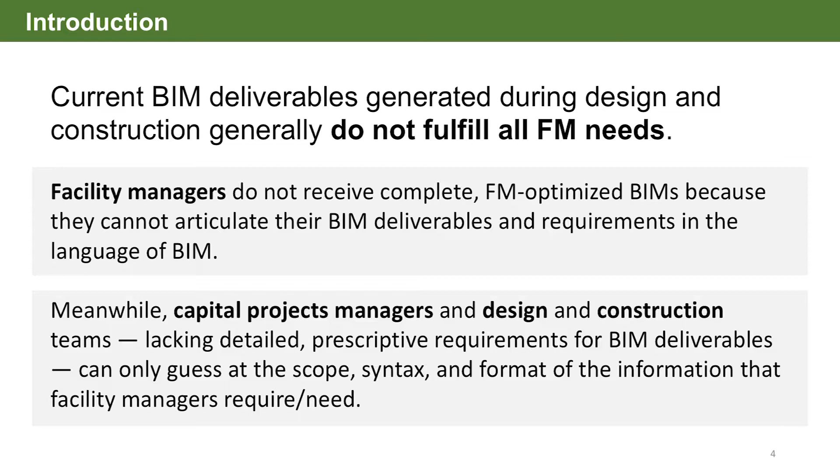Because of that, Virginia Tech is in the process, as many of you owners in the room are trying to get to that point where you actually develop your standards and specify what you really want from the design and build team.

We're focused in our application here on delivering something that would help the BIM model that designers and contractors develop during the design and construction period, to make it an FM-capable BIM. Some people yesterday referred to that as FIM, Facility Information Model. I'm going to keep the acronym BIM, and add to it FM-capable—they all mean the same thing: something the owner can really use towards their operation and maintenance.

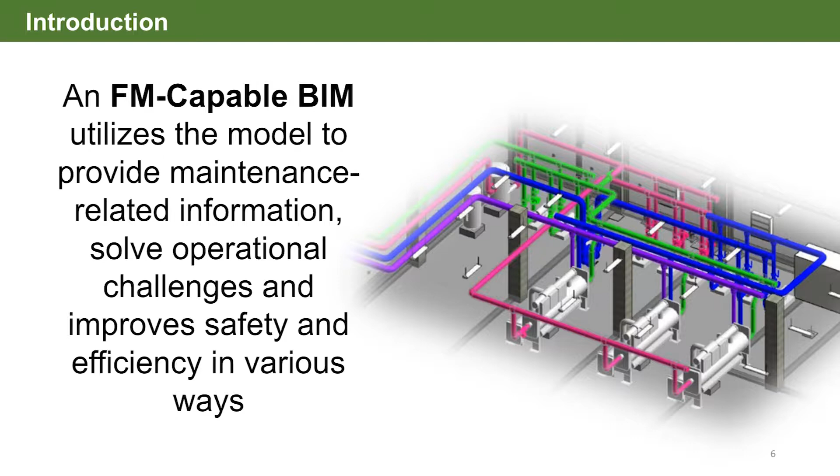An FM-capable BIM should have related information to solve operational challenges and improve safety and efficiency for the client. It should have four main elements, and we're targeting one of those elements today with our application. It should be a central repository for accurate and reliable data and information. It should provide accurate, complete representation and visualization of the facility being built. And this is where we come in with our potential solution today.

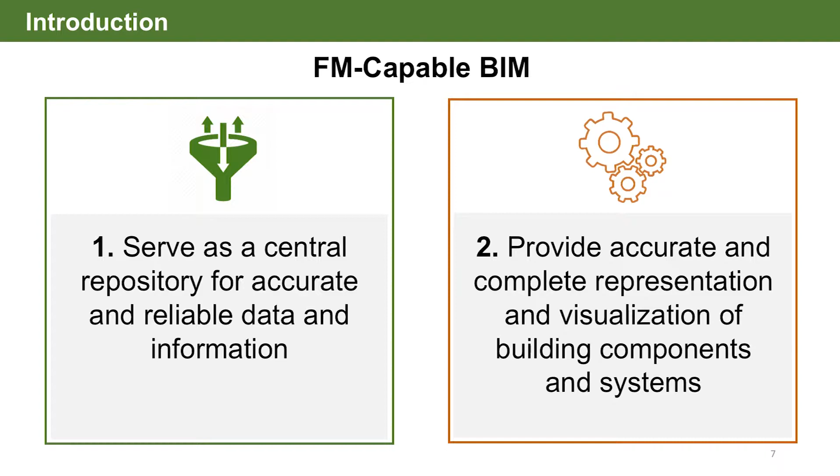It should identify relationships between building components and systems. A system-centric BIM is very critical, and a lot of owners today do not understand what that means. It means being able to connect components and systems across the board so that if you have an emergency, you can respond to it. Some people in the industry today do impact analysis that would allow owners to understand if a valve goes out or a panel goes out, who else is connected to it, and you can build that into the BIM model. It also allows you to do some analysis, whether it's heating and cooling analysis, lighting analysis, whatever.

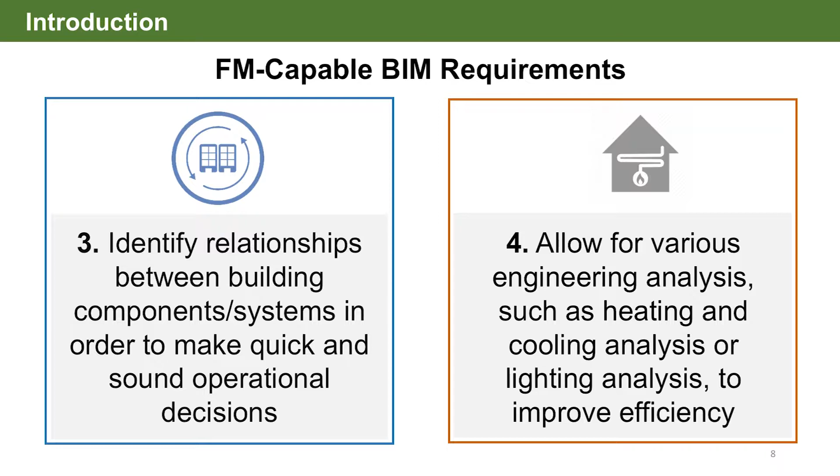So what are we doing here with this project? We are taking this requirement, having the BIM model being complete, accurate, and representative of reality. We're trying to find a way to verify that, and we're doing that using the HoloLens with some software that works with it, in a pilot project we've done on the Virginia Tech campus.

There's a somewhat new standard in the industry referred to as the level of accuracy, which, similar to the level of development, defines certain tolerances that some owners are beginning to require in their specification. I want this piece of equipment to be within a certain tolerance from where it's represented in the model. That's becoming required.

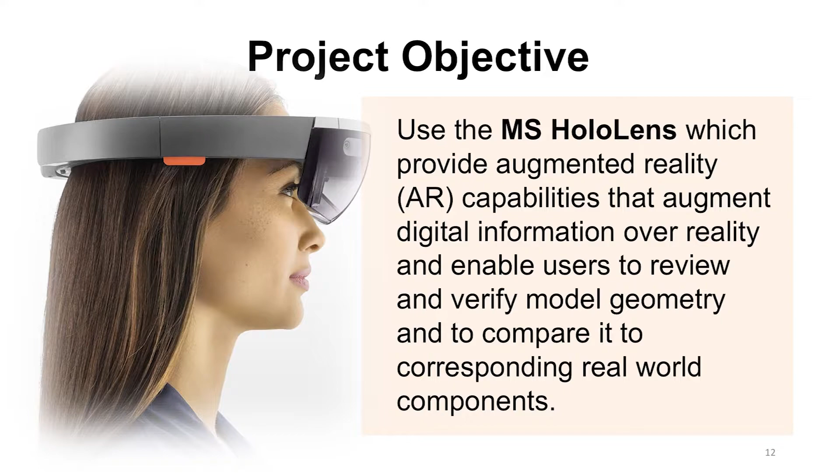So we're going to show you how the HoloLens and HoloLive are being applied to a project at Virginia Tech. Just quickly, some background on level of accuracy: these standards are online, defining 5 levels, LOA 10 through LOA 50, each associated with inches, centimeters, or millimeters of tolerance.

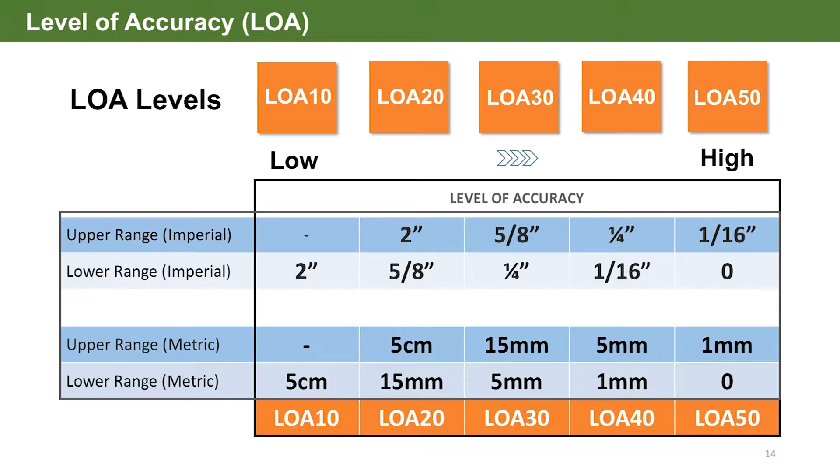This is an example I got from a contact I know from UC Health. This is a piece out of their specification: the record construction BIM shall reasonably match the location of as-installed objects and constructed conditions, with a tolerance goal of plus or minus 1 inch.

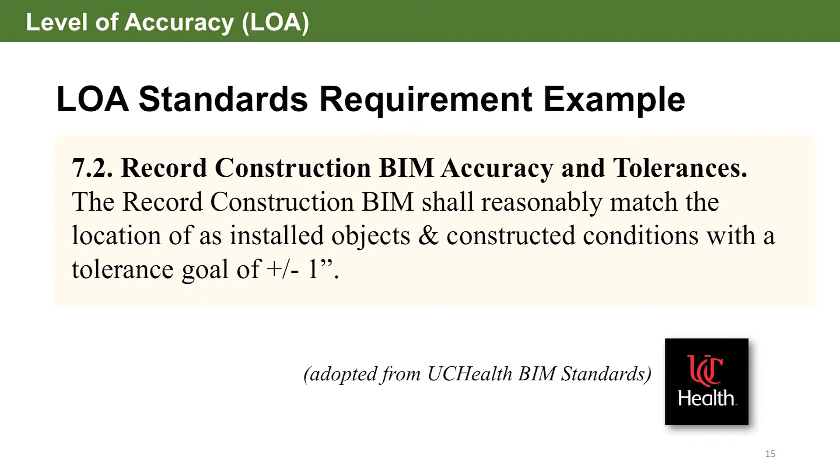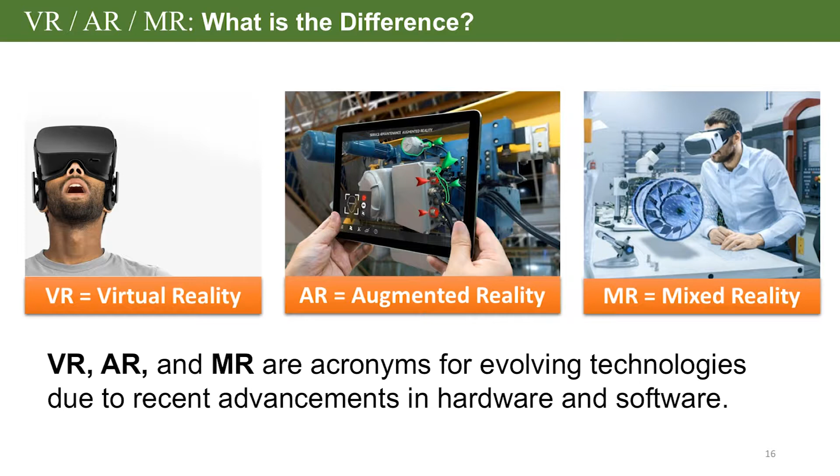Virtual reality: when you put your virtual reality glasses on, all you see is the virtual reality—you don't see anything else. You're in a dark environment with the model in front of your eyes in the glasses, or if you're aware of a CAVE, that's another way to represent virtual reality. Some examples of hardware are the Oculus Rift and the HTC Vive.

Augmented reality is intended to let me see the model and reality at the same time. When I put on my HoloLens glasses, they're actually see-through—special glasses that display the model, and behind the model you can see reality. That's how you compare the two, and that's what we're doing here.

Mixed reality is the third piece of the puzzle. It's somewhat like augmented reality, except the virtual world engaged with us is actually interactive. You can think of that as something similar to Jurassic Park, where you actually see the virtual dinosaurs running around with reality.

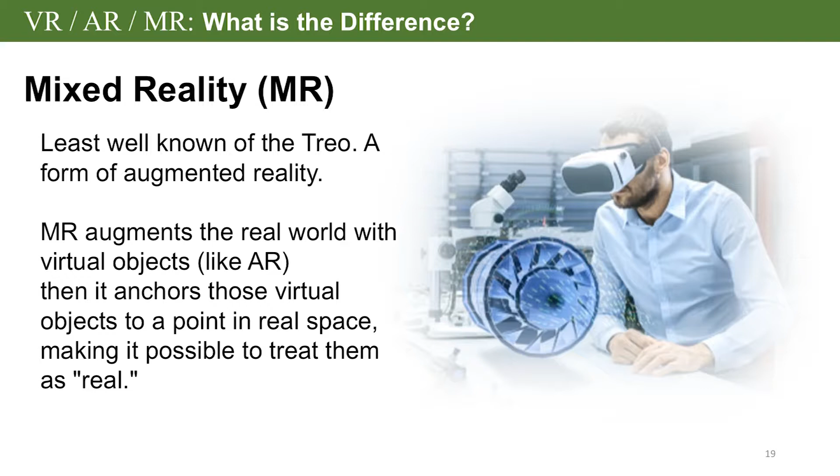So let's talk about the case study. This is a Virginia Tech facility, a 3-story classroom building, about 10,000 square feet. There's a mechanical room, and one of the floors was the target of our study.

This was a 2-day pilot project. Procon came on campus, we got together and went through the technology. We spent 1 day walking around, 3 of us—Anderson, Steve, and myself. Then on the second day, we arranged for facility staff to come to my virtual lab, where we made a short presentation to them.

We told them what we were going to do, then took them into the field and tested using the HoloLens, and also used the iPad—you'll see in some images how they used the iPad. I'm going to pass it on to Anderson to talk about the experiment.

Thanks, Waleed. When we developed this workflow, there's a much more detailed version we actually created, but for this presentation we can distill it into 5 steps. First, we had to create the augmented reality from the as-built BIM model. Next, we uploaded that to the AR-enabled device—we ran a parallel workflow using the HoloLens, and also an iPad Pro, since that may be more practical for some facility managers.

We then went on site and overlaid the augmented reality on top of reality where it should exist in the real world. We were able to observe the differences between augmented reality and reality, document those differences, and send that documentation back to the modelers so they could make corrections. Waleed showed you the Microsoft HoloLens hardware we used.

There were a couple of peripherals we used as well. We had the Microsoft clicker, which is akin to a mouse, or really just the left button on a mouse. We had a Bluetooth keyboard, which came in handy at times and syncs up with the headset. We also used the iPad Pro, as I mentioned, in the parallel workflow.

The software we used was VisualLive, which converts BIM models into augmented-reality-compliant models so you can use them with different devices. We also used Navisworks as well as Google Drive.

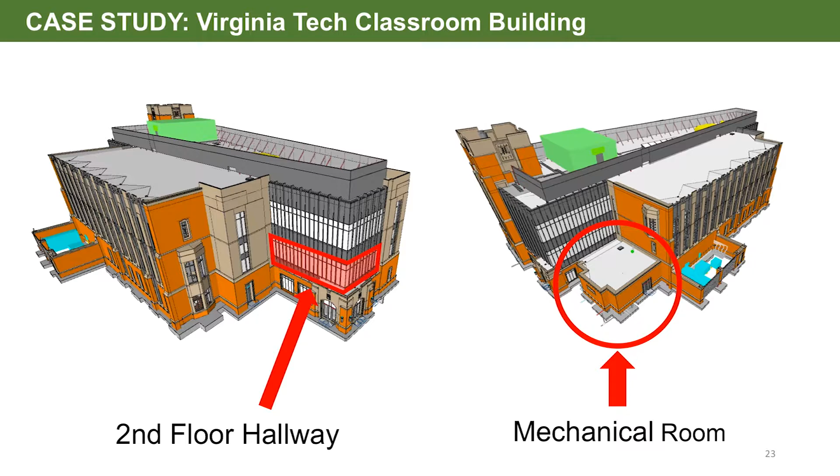Before we were able to do this, we had to go prepare the model. In doing so, we wanted to only show what was of interest to us, and this is the mechanical room right here. The reason being, basically for performance in the headset, you want the model as small as you can get it.

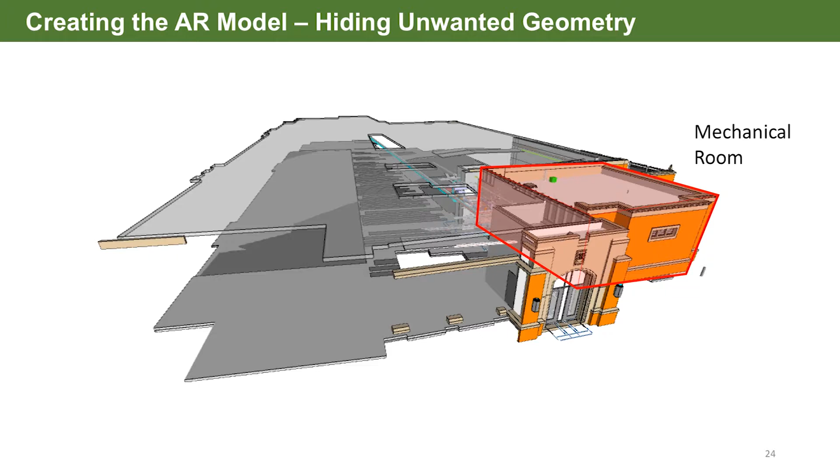I do want to mention, you can do this with Revit as well, and this process looks a little different. In Navisworks, you have to go through and actually hide all the elements or objects that you don't want to see. If you did this through Revit, you simply put a section box there, and everything that falls outside of the section box won't show up in the augmented reality model. So that's just one distinction between those two software programs.

Interesting, if I can jump here. The model was developed by the general contractor that built the building several years past, and it obviously was not intended to be a facility management model. So we found a lot of errors, as you'll see. But I wanted to let you know that we did not create the model, and it was given to us by Virginia Tech, and it was given to Virginia Tech by the contractor, but it was the outcome of clash detection models that the contractor did. There was no requirement to submit that model to Virginia Tech.

While we did find some things that were off, a lot of it did match up pretty much perfectly, so you could tell that it was located correctly in space.

Speaking of locating correctly in space, there were a couple different ways that you could anchor the model into reality. Method 1 was using the QR code. Essentially you would add a little object in your model that represented this QR code. Then you'd print the QR code off and go put that in the same place in reality and scan it with the headset, and the entire model would just locate itself.

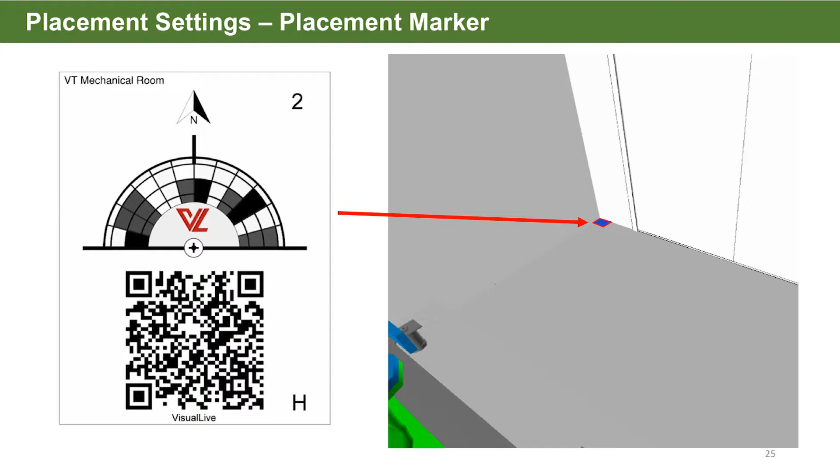The other method was the pick 2 points method. So you'd go in your model, pick point 1 and pick point 2. Then you go into the room that you're concerned with and pick those points. It did have to be that the first point had to be the same, but the second point just had to be along this line. So it didn't have to be the same exact distance away for everything to locate correctly.

There was another method, manual placement, but it was too clunky and burdensome to really examine.

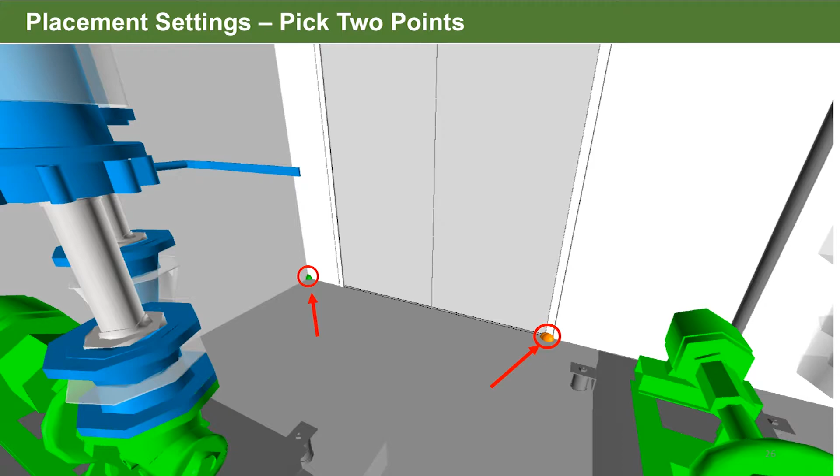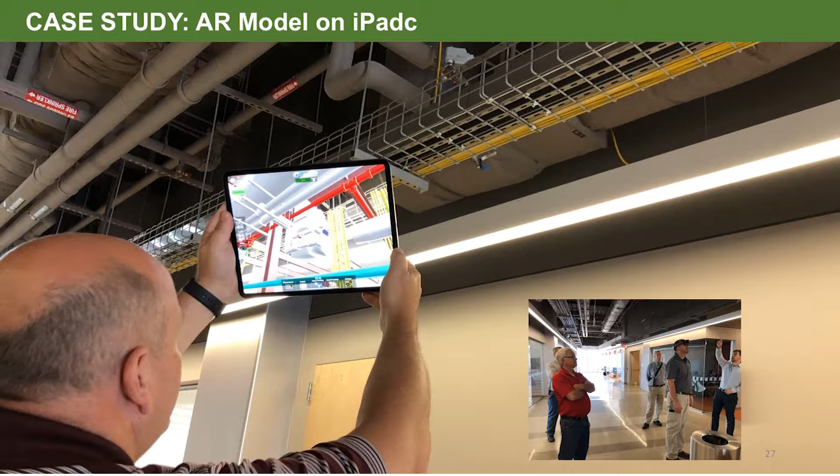So here we go. We finally got the augmented reality pulled up in the iPad. This is the Virginia Tech facility manager taking a look at that. It's kind of hard to tell exactly because we have a different perspective than him, but you can see these two pipes match up with those two pipes. This turquoise object right there corresponds with that light. So in general, things were lining up pretty well.

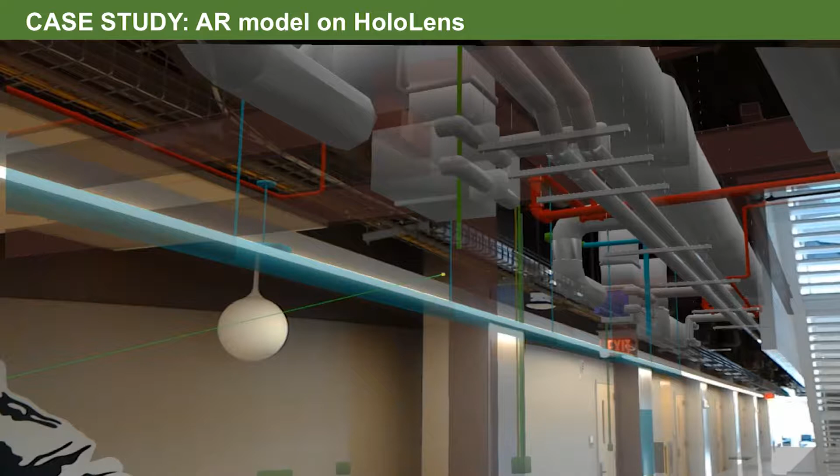Here's another example of that, a bit closer so you guys can see it. This was actually taken with the HoloLens, so it looks a little different, and the 2D image doesn't quite do it justice. When we were seeing this, it was in 3 dimensions. But as you can tell, the overlay is so good that at some points you can barely tell augmented reality apart from reality.

Before I go any further, there's functionality of the VisualLive software program worth mentioning: overlay reality. So what that is, basically, when overlay reality is off, the model takes precedence no matter what's around you. So I would see the model, and even though it's a little bit transparent, I can see reality a little bit in the background. I could only measure to the model. But with overlay reality turned on, whatever is closer in reality takes precedence.

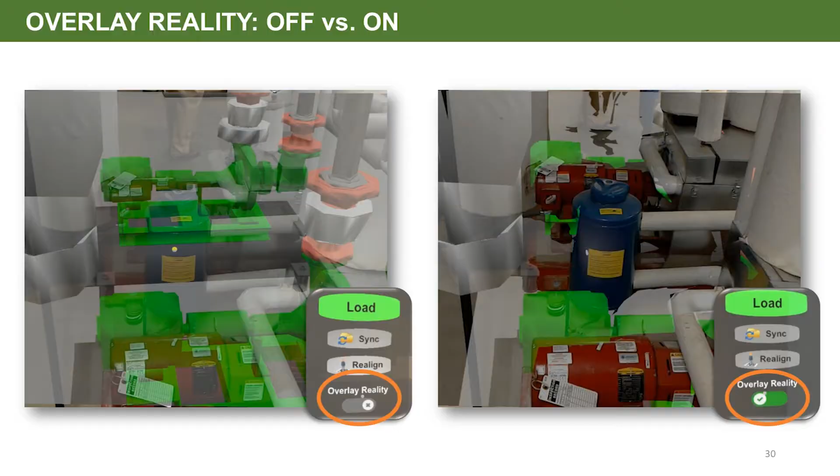For example, this is a pump, and here's the AR pump right there. But because the real one is closer to me, I'm able to select that. And that's important because without overlay reality turned on, I can't measure from reality to the model. I'll talk about this a little more in future slides.

So here's some examples of the measurements we took. This is a hot water supply pipe on the 2nd floor in the hallway that we discussed. As we can see, it looks like that's about 6.5 inches. This is the real pipe, and this is the augmented reality overlay, so those don't match perfectly. You have to take this with a grain of salt a little bit - it looks like the modeled insulation isn't the same exact thickness as reality. But in general, we know that's about 6 inches off or so from where it should be.

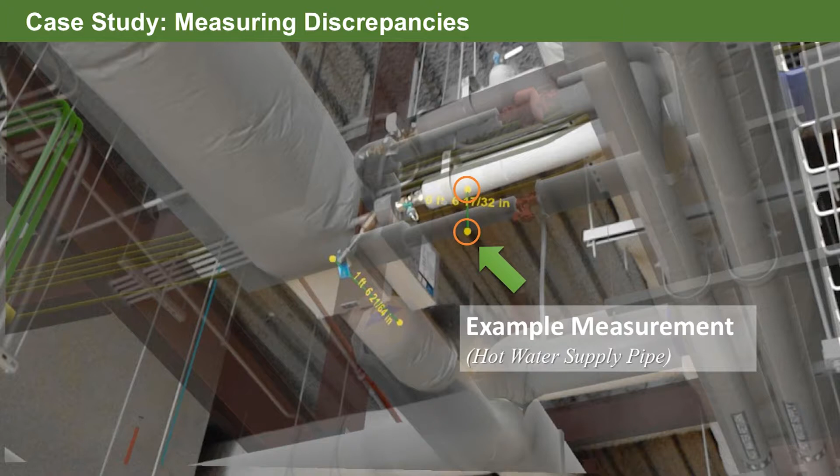Similarly, here is the heat exchanger, and we can see that's about 3.5 feet off. Kind of the same thing here - this wasn't modeled with insulation, so maybe that's only 3 feet 3 inches or so. But we can still tell that's not even close to where it was modeled.

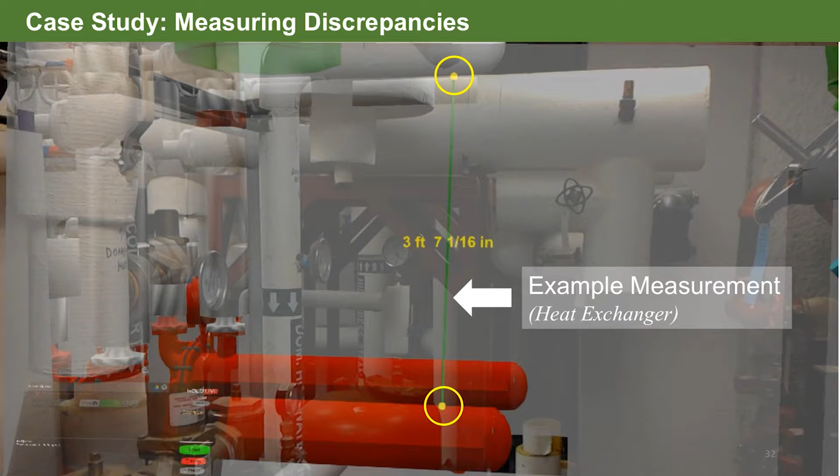So after we take all our measurements, we went through and started capturing images. Essentially, to do that, you would just press Start Capturing, and once you press it, it turns to Stop Capturing. You'd take your pictures, and there's a couple opacity settings you can choose from - that just controls how much of the model you want to see versus how much of reality.

One thing worth mentioning here with Navisworks: when you take pictures, you're actually able to upload from that perspective back into Navisworks as a viewpoint, which for those of you familiar with Navisworks is huge, because if you're using Revit, you can do switchback and immediately see the area those pictures were taken from.

At the time of this case study, that functionality wasn't working. I've used it before, but I called the software manufacturer and they said the latest update messed it up, but it should be back soon.

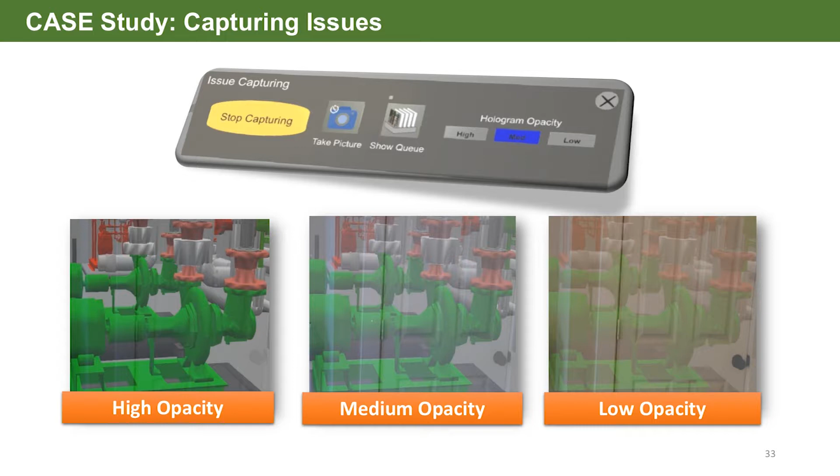So once we take our image, we have to fill out the issue name. We can categorize the image as one of four categories: either an issue, an RFI, an observation, or a punch list item. Then we can upload that directly to one of our cloud systems - that's where Google Drive came in, but it also works with SharePoint, Procore, BIM 360, and I think that's it for now.

So some of our early findings from a usability standpoint - and when I say usability, I'm referring to the ease of use and learnability of the technology used to carry out this workflow.

Some of the positives: it was really easy to set up, didn't take any time at all. There was ample instruction on how to use the software - videos and user manuals - so that was great. It was easy to align the model with reality, and once aligned, the model stayed fairly stable, as long as you weren't moving the headset too quickly. And it was typically pretty quick to create the AR models, especially if you're experienced with Navisworks.

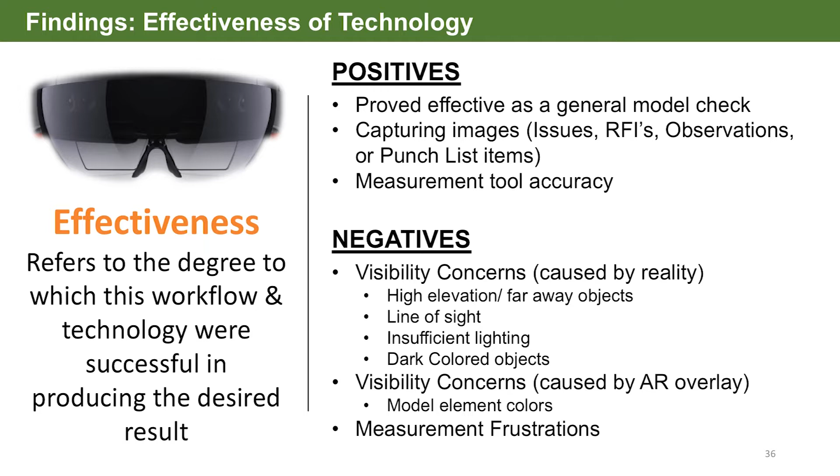So, hand it back over to Waleed.

There are a lot of big contractors in the U.S. using this technology. I know one in North Carolina that I got in touch with that I saw on LinkedIn that's using this technology for construction purposes.

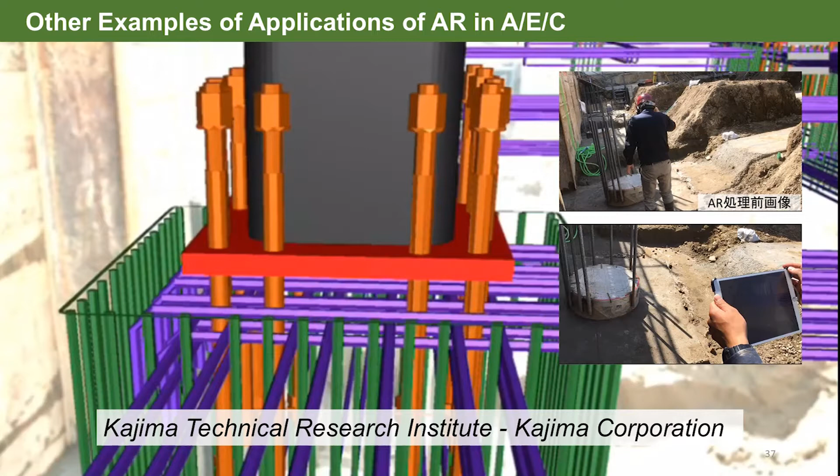This company is Kajima Technical Research Institute. I met them in Europe last month. They actually developed their own software, the equivalent of HoloLens, and they're using the technology to verify how they're building the rebar on site, and whether what they have built is exactly what the model shows. We're interested in getting in contact with them and working together because they've developed their own software, and we want to see if it could benefit us for some of the future stuff we're going to talk about.

So where are we going with this? There are a few ideas we're going to continue to pursue. One is we want to see if we can bring in the data from the model and be able to verify it in the field—so instead of just looking at graphics, looking at structured information.

We're also looking at testing how to modify incorrect information or change information in the field. As we see the information on the glasses, can we, through different input and workflows, put in new data and then send it back to the model.

This is something I'm very interested in and have talked to Procon about. I want to find a way to actually develop and program, working with HoloLens, to let the software automatically determine the distances and tolerances between reality and virtual and augmented reality.

Interactive instructions - we're going to experiment with this, how we can send instructions to workers doing maintenance in the field. So instead of just seeing the graphics and the data, they can also see instructions on how to operate or maintain a piece of equipment.

And then finally, we want to explore different software, different hardware. We're targeting the HoloLens 2, like Anderson said, and we plan to purchase one or two of them and test them in the next phase of this project.

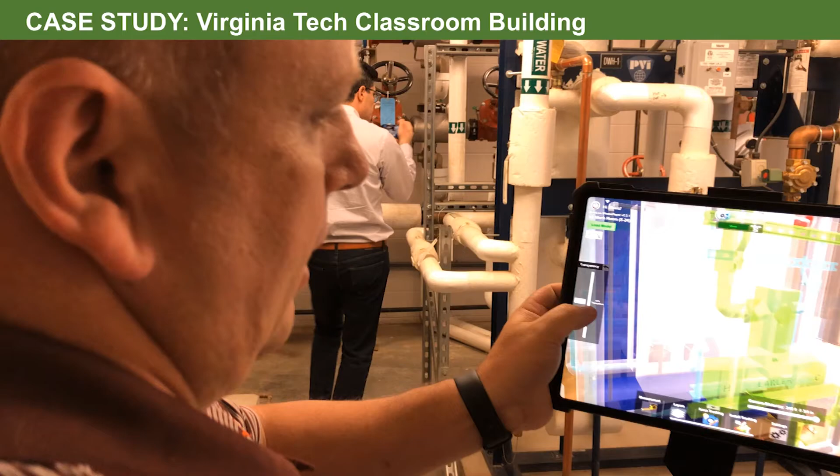You listed all the pros and cons when using this system. I'm curious, at the beginning you stated that you use the HoloLens and also iPad. Did you notice that maybe one platform worked better than the other? It sounds like the HoloLens provides a lot of positives, but it's in the beginning phase of development, and it sounds like there's a lot of issues with using it.

I'm going to let Anderson answer that, but I'll tell you my first observation with the facility staff - they were holding the iPad more.

Yeah, I think the iPad is probably more practical. It's easy to just have in your tool bag or whatever, walk out to site and have that with you. The HoloLens takes a little more effort, and a lot of people aren't comfortable with it. I've heard some people say it hurts their eyes or makes them dizzy, and I don't know if they're talking about virtual reality or augmented reality.

This doesn't really hurt my eyes that much, but the study wasn't as much comparing the two. We kind of just, since we had that technology, decided to test it on the iPad as well. It was really set up focusing more on the heads-up display at first. So we don't have a direct comparison between the two, but I'd say for the most part the outcome was pretty comparable.